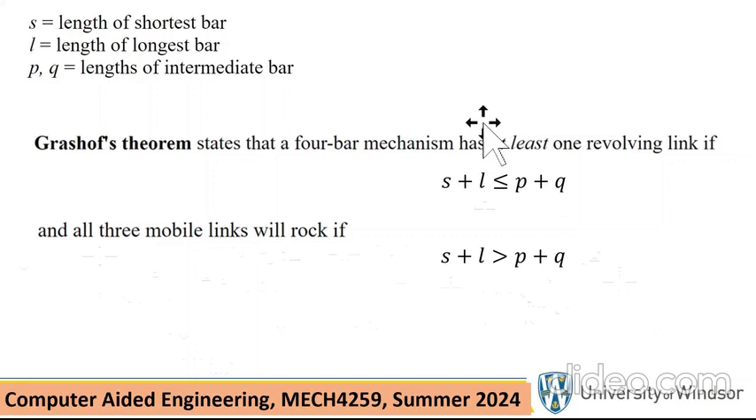Okay, so we're going to do this problem, and the dimensions that we use are exactly what is given here.

The mechanism shown here can be viewed as a 4-bar linkage. You might say, wait a minute, there are only 3 linkages here, but the 4th one can be viewed as the ground from O to C. Therefore, it is possible to actually make 4 linkages, as I did in the lecture on July 4th.

However, I'm not going to do that. I will actually make only 3 of them. And there's a few things you have to do. First of all, you have to make this thing, make a cartoon out of that, basically make it move.

And incidentally, this is a Grashof mechanism. The sum of the smallest link plus the largest link is less than or equal to the sum of the other 2. Therefore, there is one link that actually can rotate continuously, and that will be link OA.

Now, once you make a cartoon out of this, basically, you're going to apply some physics into it. In other words, we're assuming that this thing turns at 60 RPM, or 360 degrees per second.

And then we are asked to plot a few things. We are asked to plot the trace of point D, which is halfway between A and B, and also the plot of the magnitude of linear acceleration at point D as a function of time.

Insert new part in there. And I'm going to call this thing OA, properties OA, which is 10 inches.

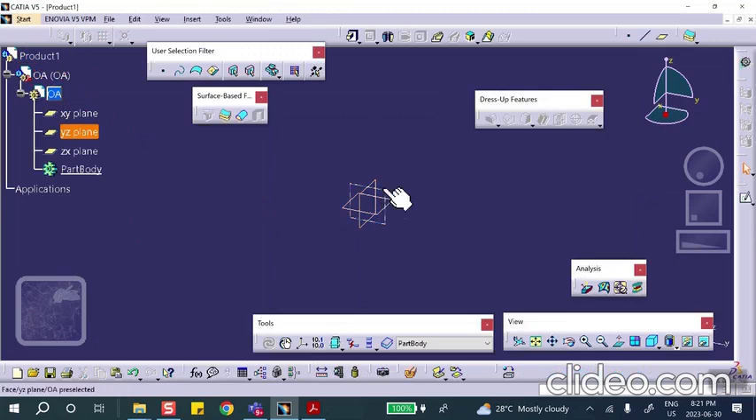Okay, let's make that. So on a convenient plane, on that vertical plane, I will sketch a profile like this.

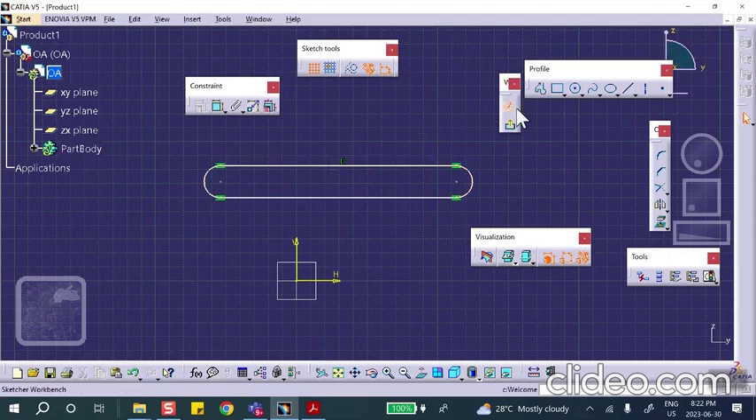Let's make this thing 10 inches from here to here. And just so it looks better, I'm going to make a little circle here and another one there. These are unnecessary, but I'll do it. This circle is going to be 0.25 inches as radius, and this one also 0.25.

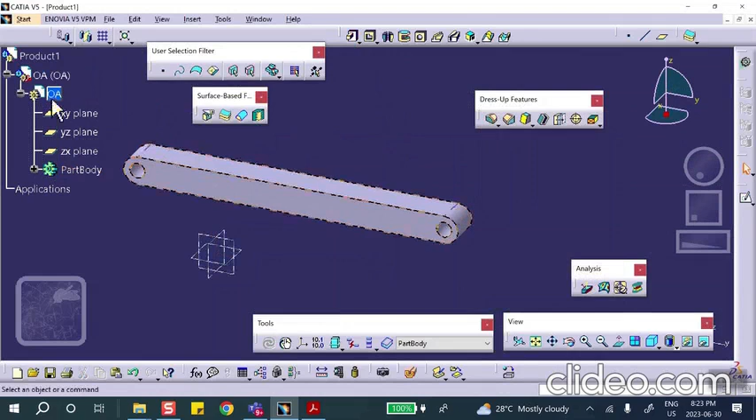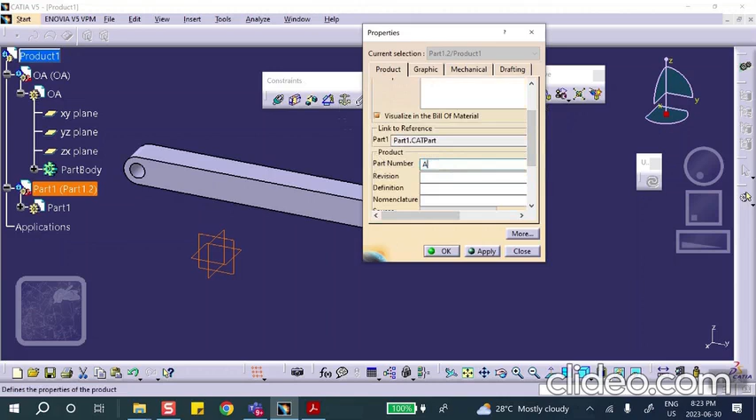Exit. Why don't we pad it by 1 inch? So then we're going to do the other link, which is AB, 26 inches. Insert new part, say no. That's going to be AB.

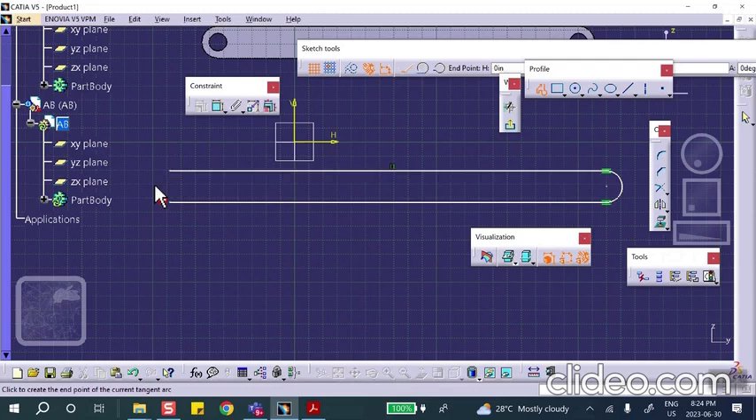Let's make it on that vertical plane. I will sketch something very similar to the other one, except that the length is 26 inches. So this will be 26 inches.

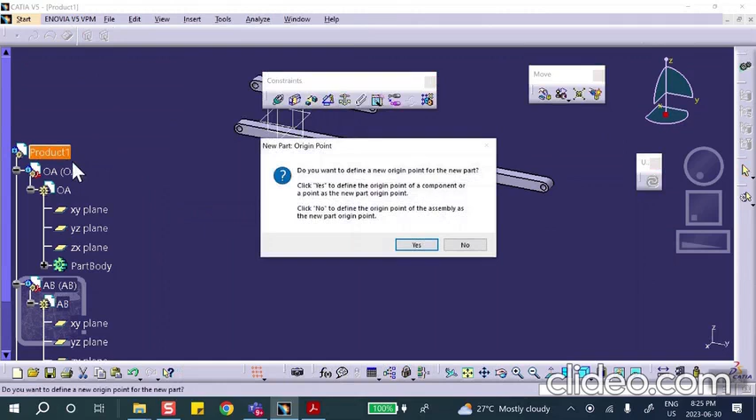Let's make some small radii here, or circles here, 0.25, one on the other side. Exit, and pad it by once again 1 inch. We go up here, insert a new part, say no, and this thing is going to be BC.

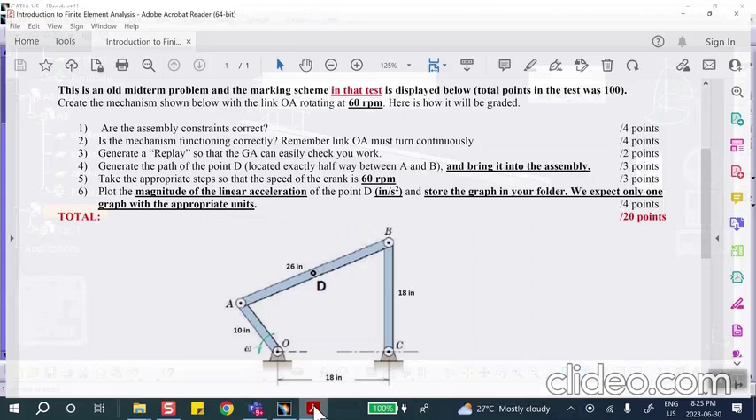Before I do that, since we are interested in plotting the trace and getting some information about point D, we might as well create a point exactly where it's supposed to be. So let's go back to AB. On that face, we sketch. What about doing a point which is exactly 13 inches away from this end?

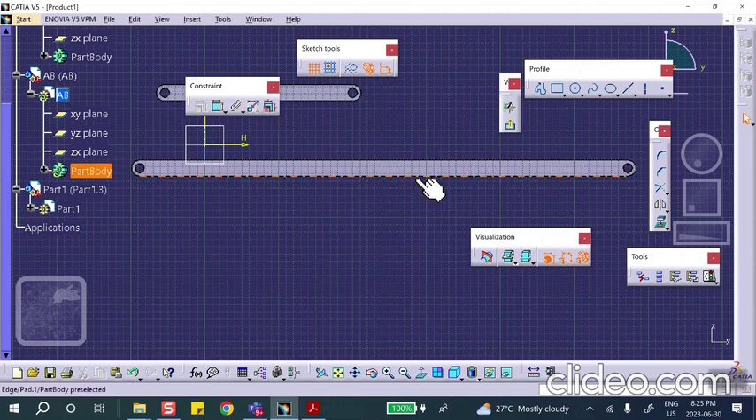Let's create a point here. Actually, maybe it's easier to do it like this. Let's create a point which is exactly the center, the center of a circle over here.

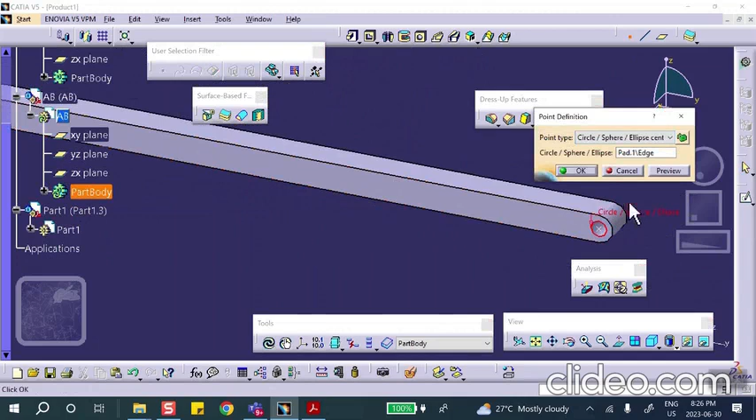I can do one on this side too, and then I create a point halfway between these two. Another point exactly between this point and this point, the middle point. There are other ways of doing it, of course. So it's going to be right there, so there's my point that I need later on.

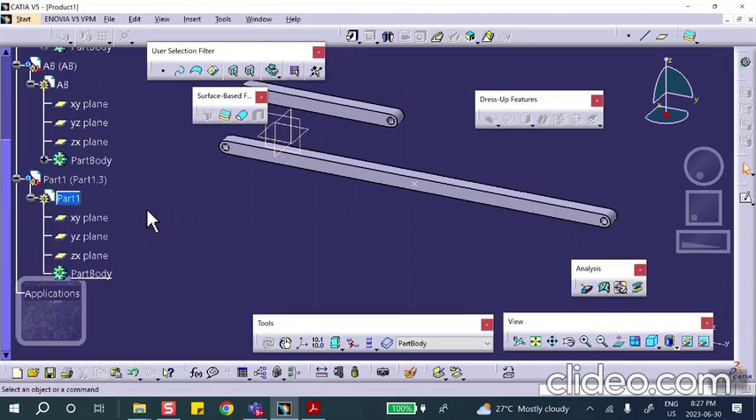Okay, good. So let's go back to this part. Let's change the name of it. Actually, let me do it from here, properties. That's going to be BC.

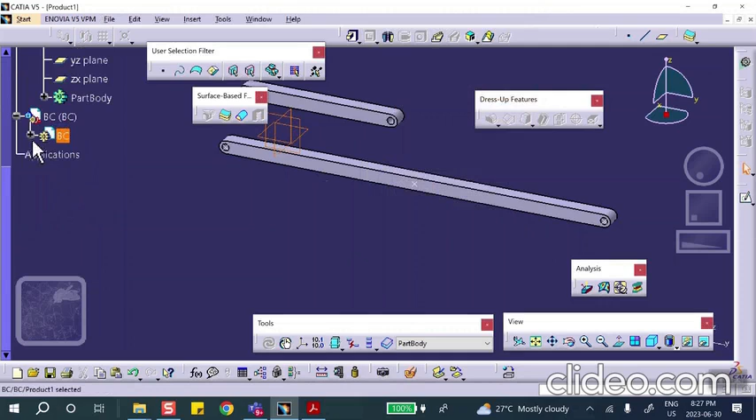Okay, let's make it. Double click, and that one is 18 inches. We are in the part design on that vertical plane. I will sketch my profile just like that, except that the length of it is 18 inches.

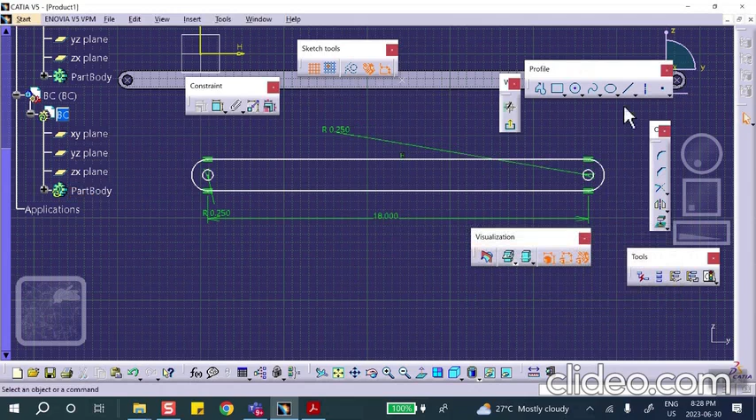Why don't I make these circles, another one on this side, give it dimensions, 0.25, and on this side is also 0.25. Very good, exit. Oh, this length is 18, right? So that length is 18. All right, exit. Pad it by 1 inch.

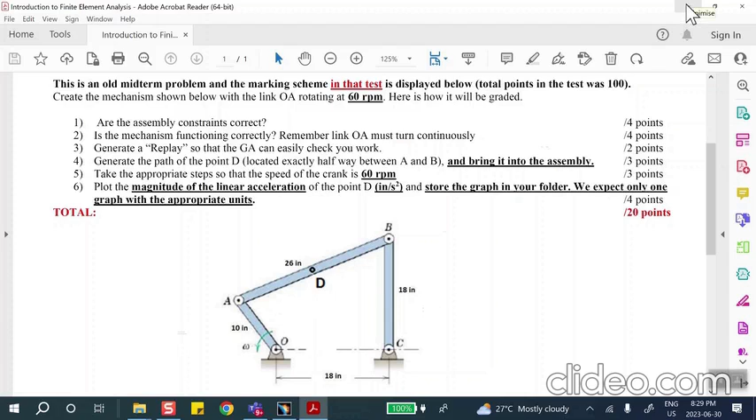Now as far as this is concerned, either I can make a link OC of length 18 inches, or I can create something I can call base, a circle here and a circle there, then pad it, and the distance between them is 18 inches. So let me go that route, because I did it with the fourth link being created a different way in the class on July 4th. So let's do it a different way.

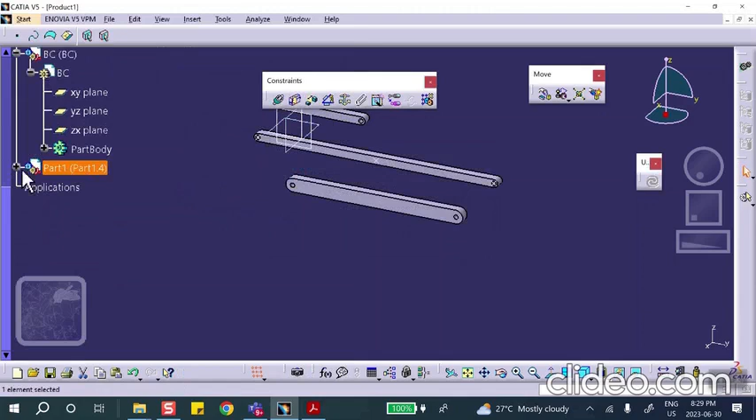So insert a new part in there, and I call it the pivots. Right click, properties. Pivots, how about that? Pivots, or the ground if you want. You can call it ground, pivots.

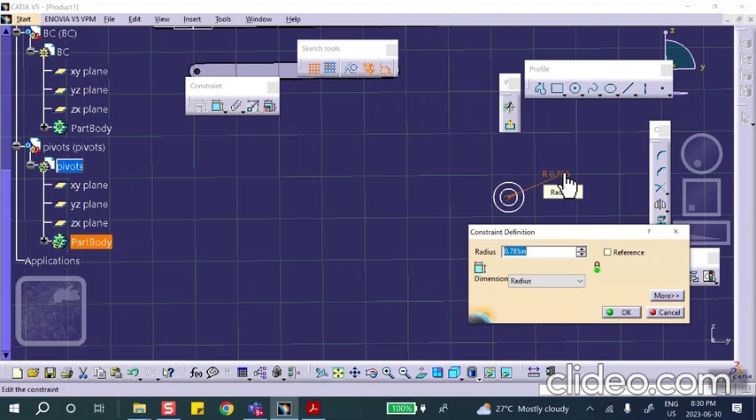Okay, let's make it. Double click on a convenient plane, on that vertical plane. I'll sketch 2 circles, one like that, another one like this. Let me give the inside radius 0.5, 0.25. Okay, all right, and do another one.

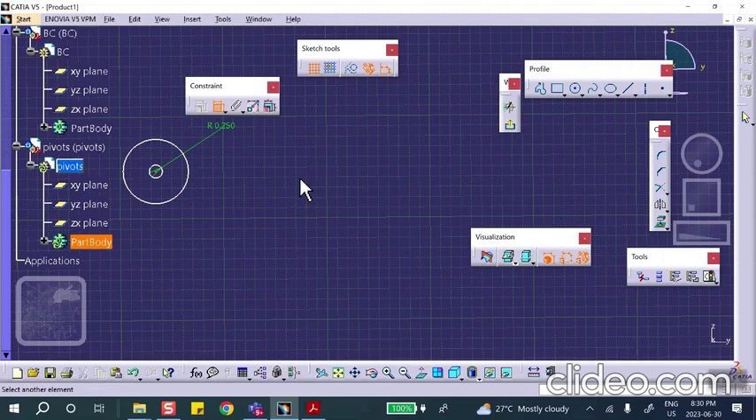0.25, and the distance between these two, this point and that point, being 18. So this is going to be my ground.

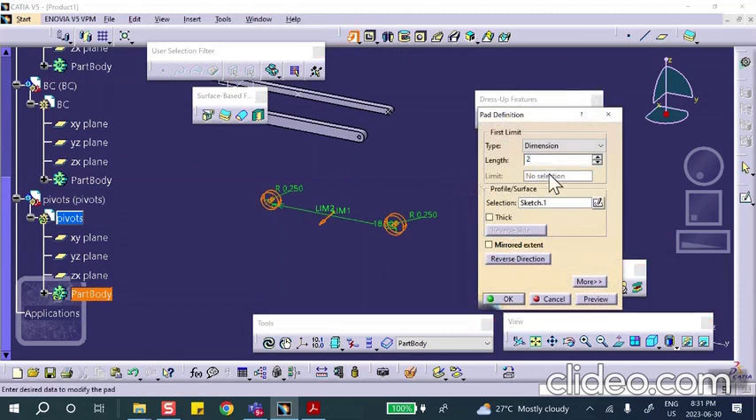Okay, good. Exit right there. Why don't we pad this thing by maybe just so that it looks better. But well, let's make it 1. That's fine. So this is going to be the ground. It's a single part, by the way. You go all the way to the top.

Why don't we save our stuff? File, save management. There's the product. Save as, desktop, new folder. So this is going to be July. What is that? 7. July 7. So everything is going to go there.

Good. Now we're in a position to assemble. So why don't we first of all anchor this part. Okay, so anchor this part. So this is going to be the ground. It's not going to move. Now I'm going to put this OA on this side.

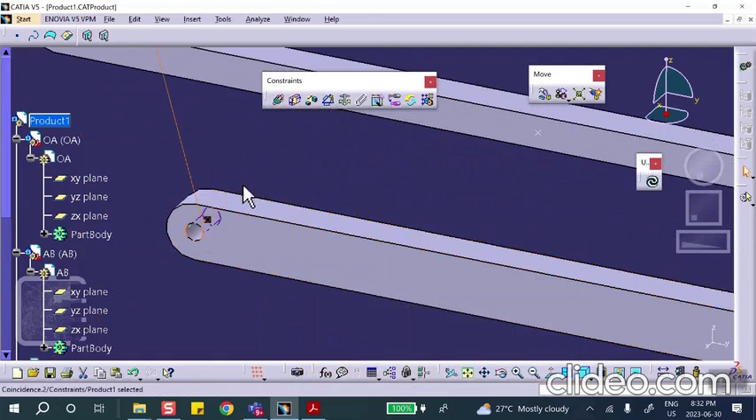So coincidence between this axis and that axis, and coincidence between this plane and that plane. Update.

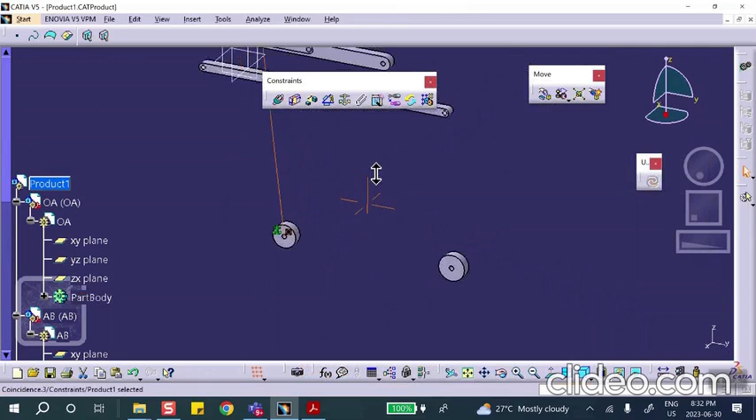Where did you go? Oh, I think I just made a mistake here. So let's do a Control Z here. Let's see now. I think by mistake this constraint should have gone coincident with this. So let me see now. This guy I'm going to delete. I'm going to delete that. What is this? Oh, this is also wrong. Okay, let's try it one more time.

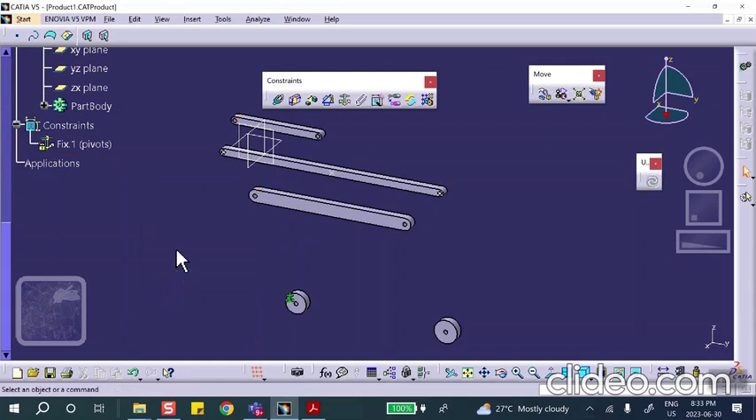Coincidence between this axis and that axis, and coincidence between this plane and that plane. And update. Yeah, that's a lot better. Now, if you see something that you don't like, see that? I don't want it to look like that. Double click on it, flip the arrows, and say OK, and update. See, this looks more civilized.

Okay. Right, let me rotate this a little bit. Rotate about that axis, like this, so that I can see it better.

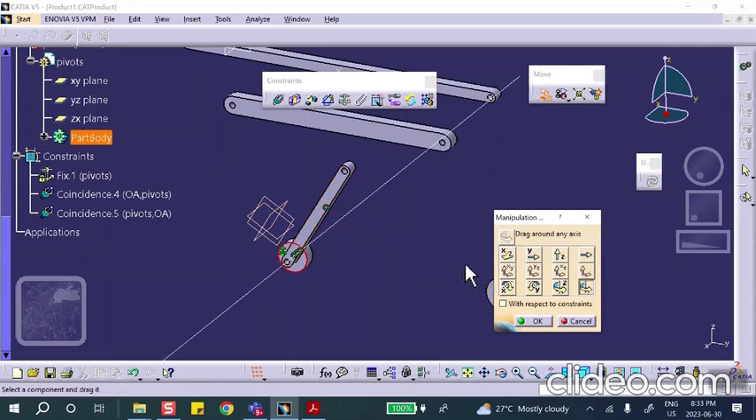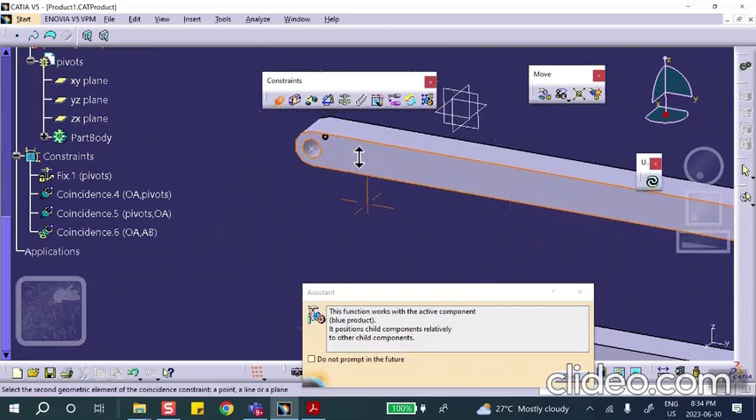All right. Now let's put this 26 inch link there. So coincidence between this axis and that axis, and coincidence between this plane and that plane. Say OK and update. Doesn't look good.

I don't like it. So double click on it, flip the arrows, or flipping the arrows is the same as actually changing this thing from same up to opposites. Does the same thing. Okay, update. Yeah, that's more respectable.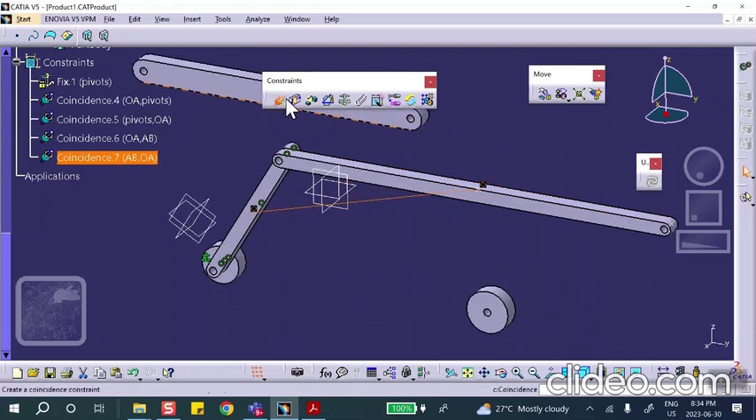Right, so now let's put this guy in there. So coincidence between this axis and that axis, and coincidence, oh no, Control Z, coincidence between this plane and that plane. Now update. Okay. Again, I don't like the way this thing looks, so click on it, update. That's more respectable. Ooh, yeah.

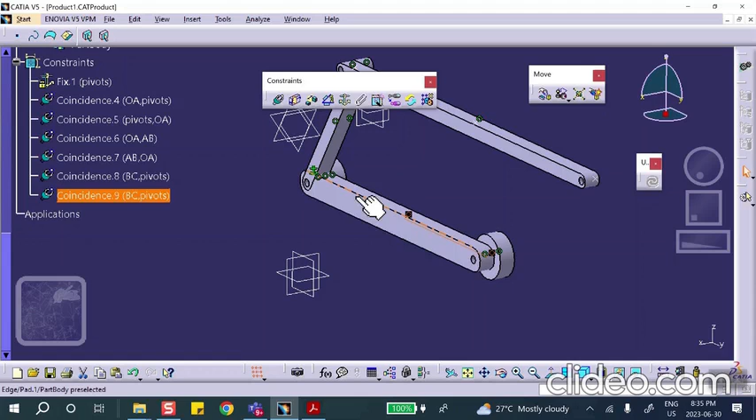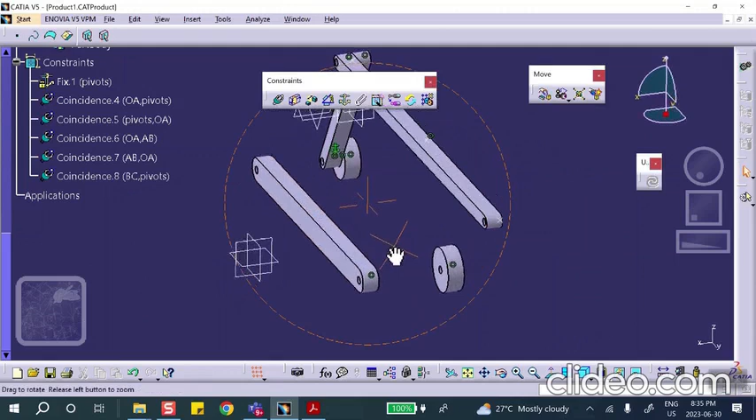Okay, as a mechanism, this thing works, but I don't like the way this is set up. So I'll tell you what I'm going to do. I'm going to delete this, and I will move that guy in the direction X. Okay, and let's see.

Yeah. And I make coincidence between this face and that face. Okay, update.

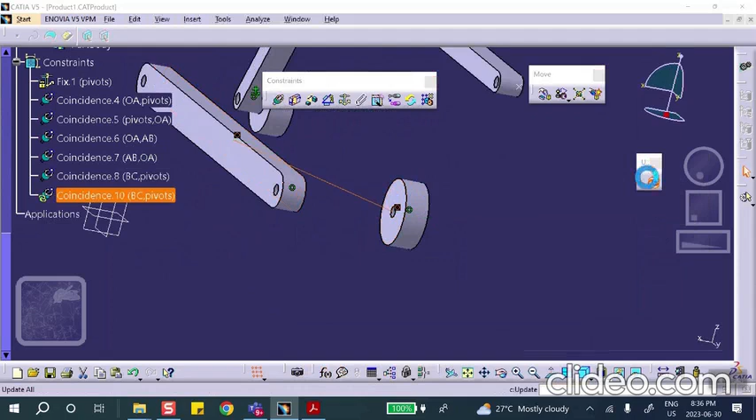All right. Now, again, I don't like the way this thing looks. So what I'm going to do is I'm going to double click on this more. As a mechanism, it really doesn't matter. This will work, but it's just that the way it is done, I don't like it. So I want this guy to be mounted on that fellow. Okay. Let me see for a second. What's the best way of achieving that? So these are okay.

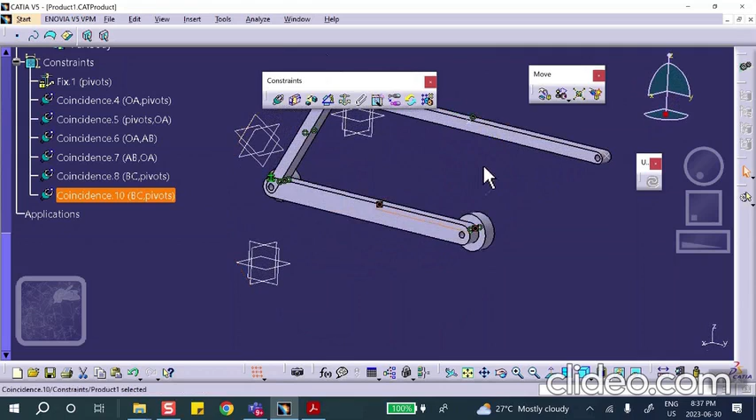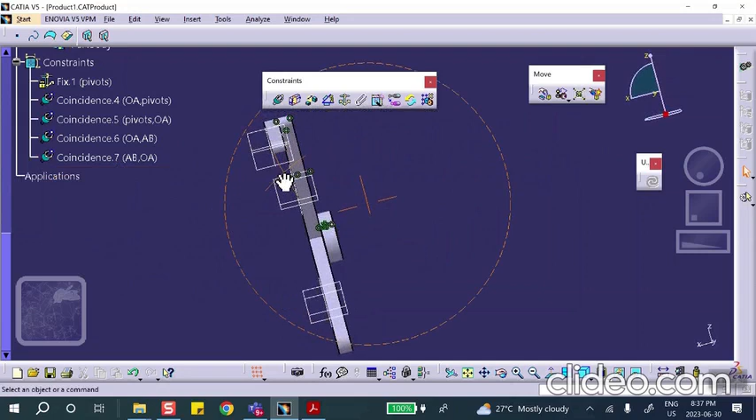Okay, let's do this. Let me move this thing away. As a matter of fact, these I'm gonna delete. I'm gonna delete this. I'll do this one first. What I will do is, let me see for a second. Yeah.

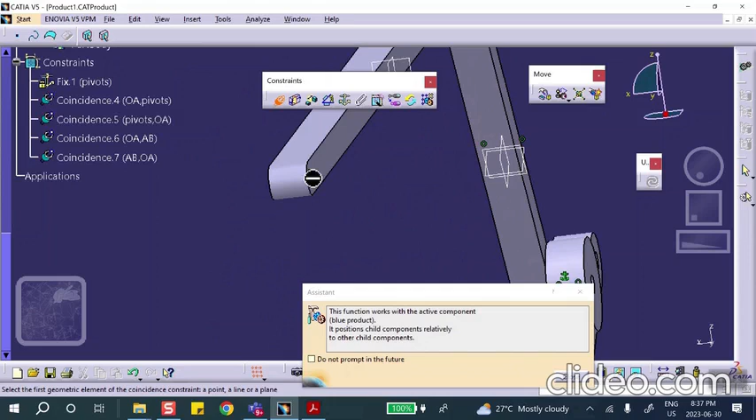Okay, here's what I'm gonna do. Coincidence between this plane, this axis, and that axis. No problem.

And I want a coincidence between this plane and that plane. How about that? Say update, except that I want to flip.

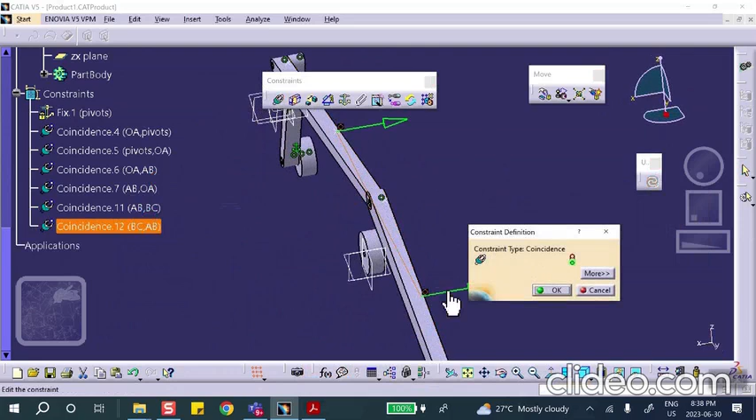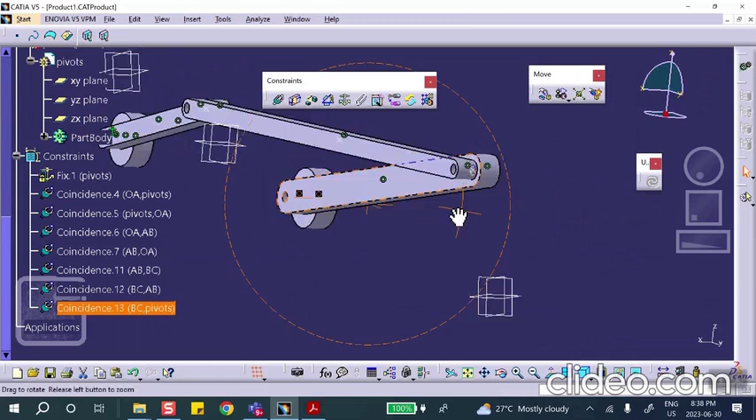Yep, that's more respectable. Now we go coincidence between this axis and that axis. Update. You see, it looks a lot more respectable.

I could have left it the way it was. It's just that it just didn't look good because when things were going through each other, etc. But as far as the mechanism is concerned, that would not have made any difference.

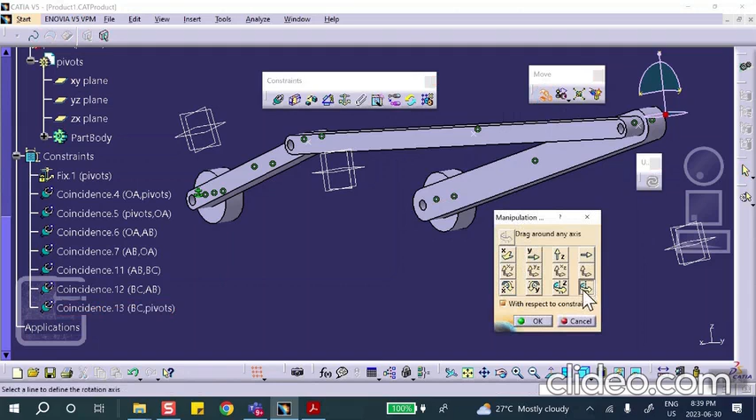So I'm going to go to the move, manipulate icon, check this box, and say rotate about, for example, this axis. But yeah, but this axis. Let's see if it works. Yeah, you see that? You see?

Yeah, good. So we know that this is working. Okay, let's go ahead. Very good. Save everything. Once again, I want to emphasize that I spent some extra time here trying to make it look good so that these parts don't go through each other. However, as a mechanism, it will not make any difference. But I want to make it look exactly like what I'm presenting to you.

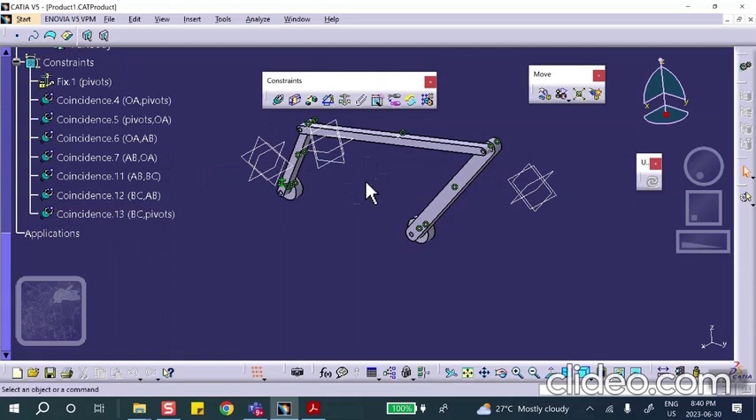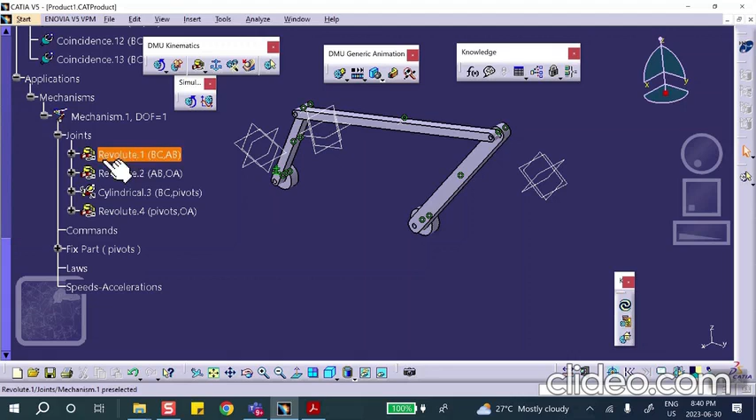So now we're going to go to digital mockup, DMU kinematics, get the magic wand out, new mechanism, auto create, and I'm going to have one revolute, two revolute, three revolute, and a cylindrical, probably, unless I missed something. Yeah. Okay, good. Degree of freedom is 1 because this is the crank that can turn continuously, and that first one, I believe, was revolute 1.

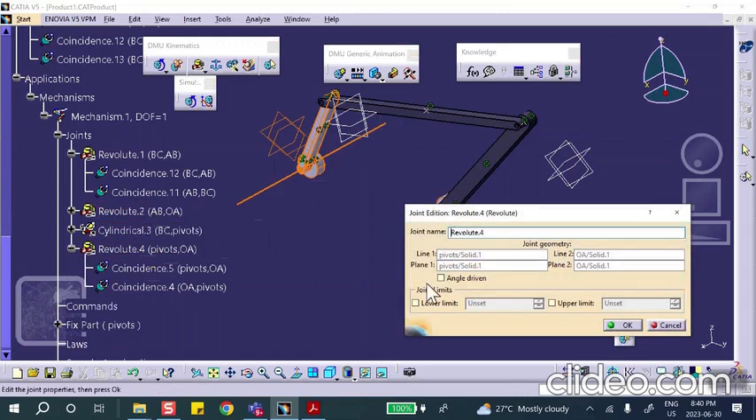No, no. Which one was it? Between AB and OA, right? No, cylindrical, is it this one? Oh yeah, that's it. OA. Okay, so make it angle driven, make it 0 to 360. Good, mechanism can be simulated. You can do a simulation with command. Let's check it out. You can see, that's the one that turns continuously, and then reset it. It's fine. It works. Okay, good.

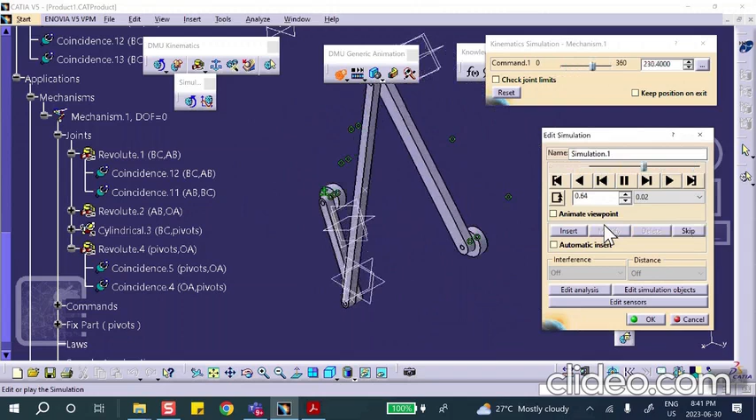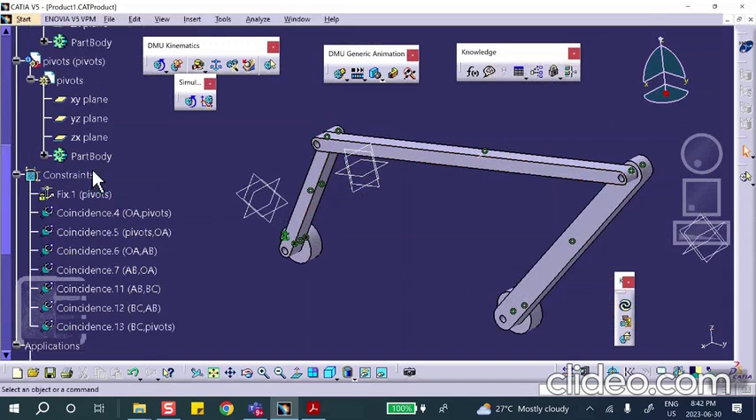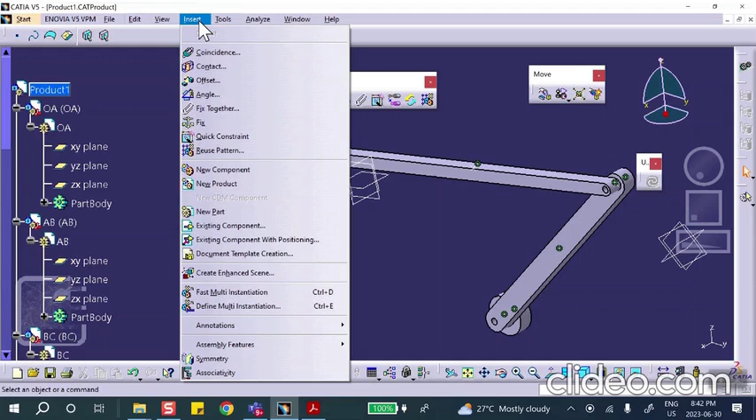Incidentally, if you want to hide all these planes, it is possible. The easiest way of doing it is if you go back to assembly design, okay, and say view, hide. Is there a hide here? Let me see. That's edit. Oh, sorry. Tools. I thought there was a view hide all planes or something like that, but I don't see it. So let me do it a different way for you.

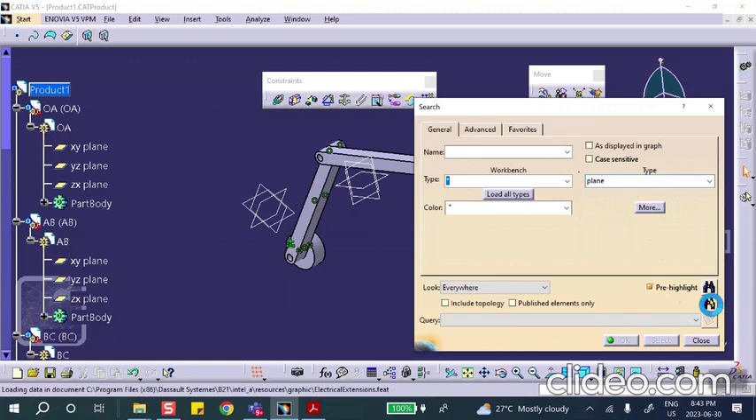So what you can do is here. This is how I'm going to hide and show. Okay, this is the easier way of doing it because I can't find the thing I'm looking for. Search. Type here plane. Not there. In here, the type plane, and search and select. And once it finds it, just hide them. There. Okay, good. And go back to digital mockup, DMU kinematics, back there.

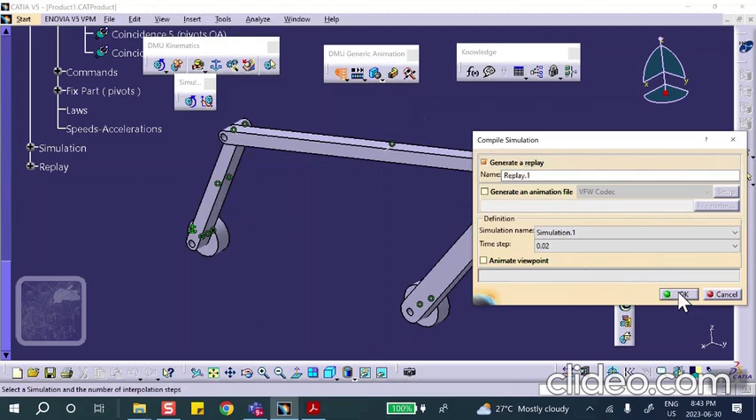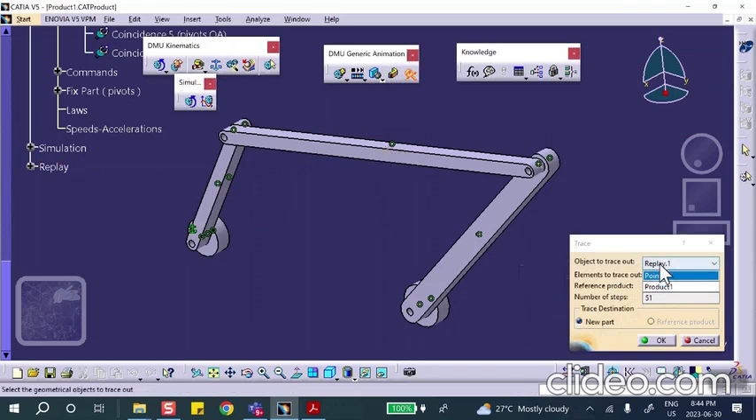Actually, it looks like I can't change that right here. That's okay. Oh, something I must have forgotten to do. Let's close this. Don't save it. Try it again. So where is that trace? Element to trace is this point. Yeah. We created the replay. Good. Oh, he was there. He was hiding there. So save this thing, file, save management. The trace was here. Save as, in that folder, save the trace.

Let's see now. This is the trace. Yeah. Save as. Trace 2 is fine. That's okay. Let's get rid of this. Can I insert the trace? Insert existing component in there. Trace right there. Good. So if I do the replay, you see that that point actually goes through this. Okay.

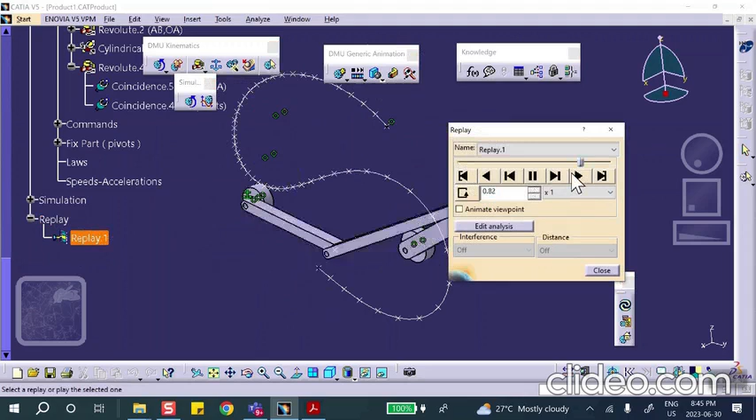So, try it again. You can see that point in the middle of the link AB traverses that curve. Okay, so let's stop that. And if you don't want the trace, just hide it, but make sure you save it, because when it comes to exam, we need to see it if you're asked to generate it. So where's that trace? Right here, hide it.

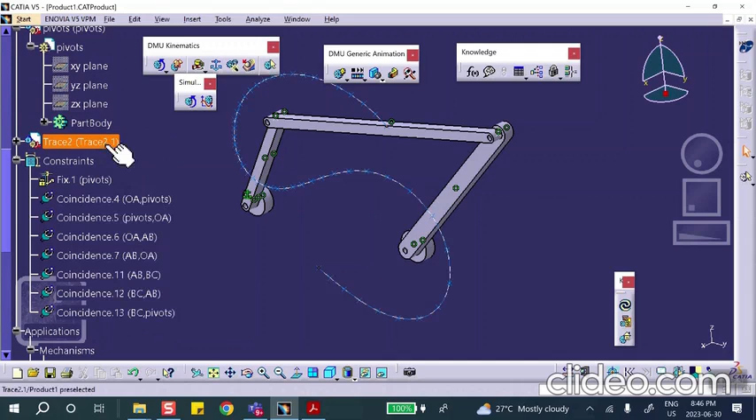Now let's put some physics into this. So we go to f of x, click on the mechanism. So this is the angle-driven joint. So we say add a formula, 60 RPM was 360 degrees per second. So 360 deg/1s times time.

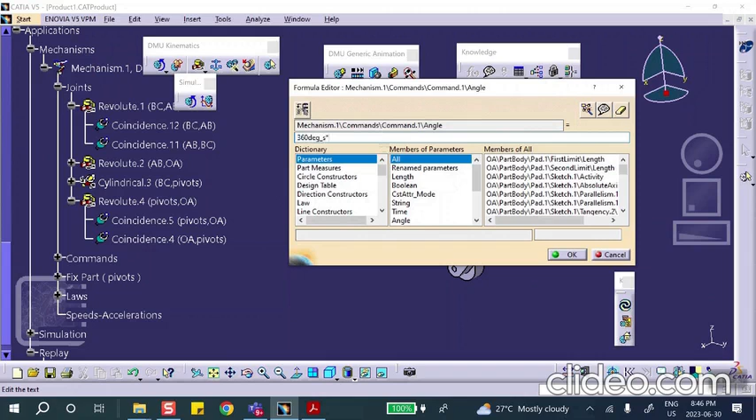All right. And let's go and do a simulation with laws. Simulation with laws. Let's do it 2 seconds, a 2-second period, and play it. There is physics here. Believe me, there is physics. Okay. There is physics. That's why it's not that choppy either.

Now, let me actually make it 3 seconds. How about that? I mean, the problem statement says 2, but I'm going to make it 3 here to convince you that actually that choppiness is not there. See that? 3 seconds, it does 3. So here, let's put it back to 2. On the test, if you're asked to do it for 2, do it for 2, please. Rewind, play. Good. Okay.

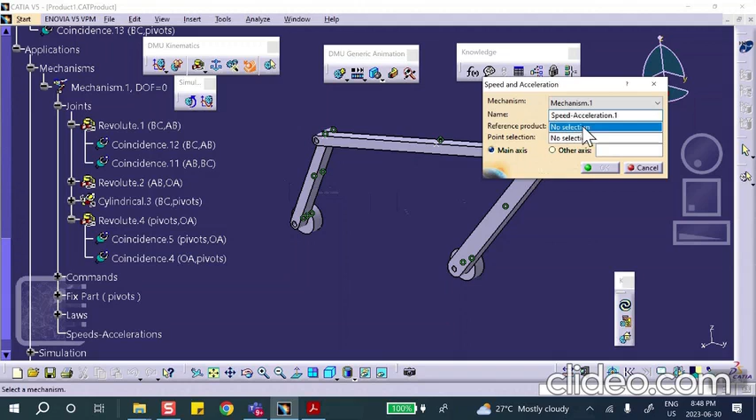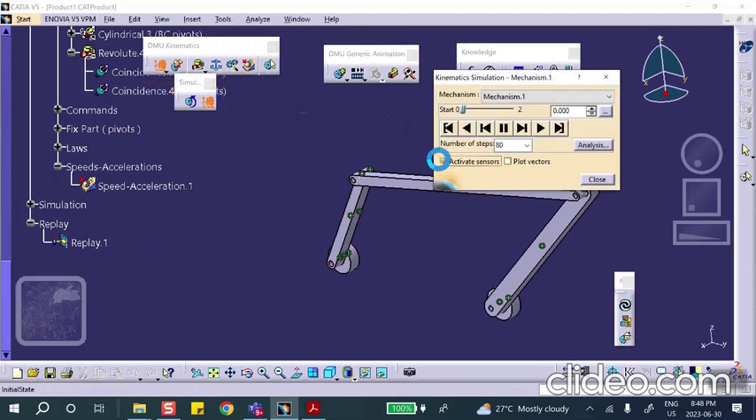You're asked to plot a magnitude of linear acceleration, but there is no magnitude thingy here. But linear acceleration, actually not speed, acceleration, right? Linear acceleration without any x, y, z in front of linear acceleration. This is the magnitude. We're asked to find the magnitude of linear acceleration. Yeah, good. So now we requested that information right there.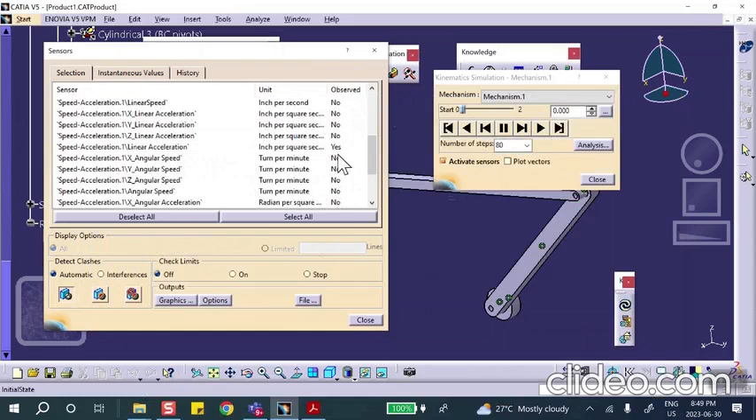You can see that. You play it. And then you say graphics. And there we are. So this is the linear acceleration of that point as a function of time. That's what you're asked to generate. Now make sure you zoom out so that everything is there. The scale is here, the units are here, and then you do a print screen here.

So you go to the Word document, paste this thing, home paste. There we are. This is what we want to see when it comes to marking your test or your homework. File, save as, browse, desktop, that folder which I call July 7, and you put down my generated plot.

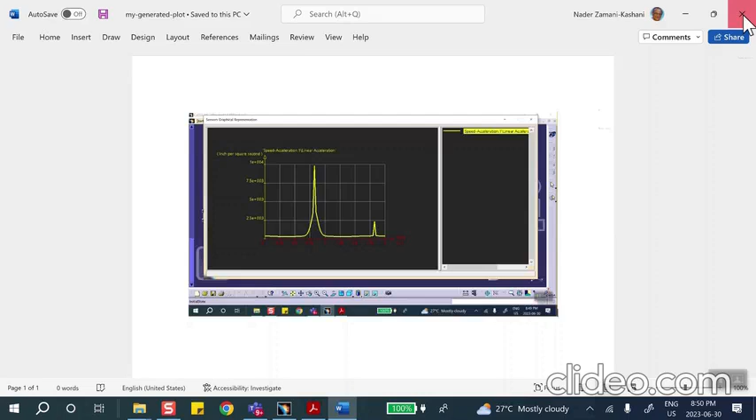Make sure you give us only the plot that we're asking for. If we're asking you to generate a plot of, for example, linear acceleration versus time, don't give us the x component of it or the y component of it. Don't give us the velocity. This specific plot is what I'm looking for. Okay? Otherwise, we will deduct marks. The rationale is that you don't know what it is that you have to do, so you decide to plot everything. So that is a no-no. Okay, so this is all done.

This is a short video segment that is related. Both of them involved a 4-bar linkage, and this particular screen that you see here is for the morning class, but the same issue came up with a couple of people in the afternoon class. So here's the situation. This is a 4-bar linkage because the fourth bar that's not showing is actually the ground. In other words, I could have made another link here instead of these two pivots, and held that stationary. Okay, so this is a 4-bar linkage.

The question that came up, from a couple of people, is why is it that the fellow next to me is getting a trace like this, and I am getting a trace like that, or the other way around? In fact, when you look at this, what we have here is half of one trace. And the question is why? At the time, I didn't know what they had done or what I personally had done on the video, but here is an explanation of what happens. Although this is related to the morning class, the same thing applies to the afternoon one, if you're not getting exactly the same thing that the fellow next to you is getting.

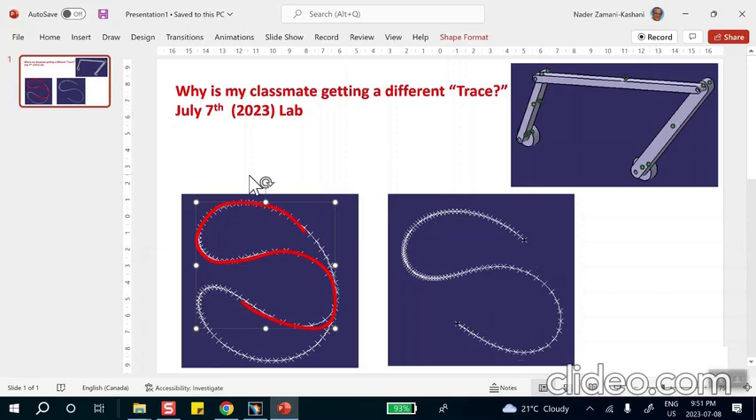So what happens here is that when I did the video, I made this crank right here, I think this was called OA link, go only one revolution, not two revolutions. When you go one revolution, you actually get this. But if you make it go two revolutions, then you get the full trace. Okay, so to do that, I'll go back here. This is actually part of the video that I had done. So let me show you what my mechanism is.

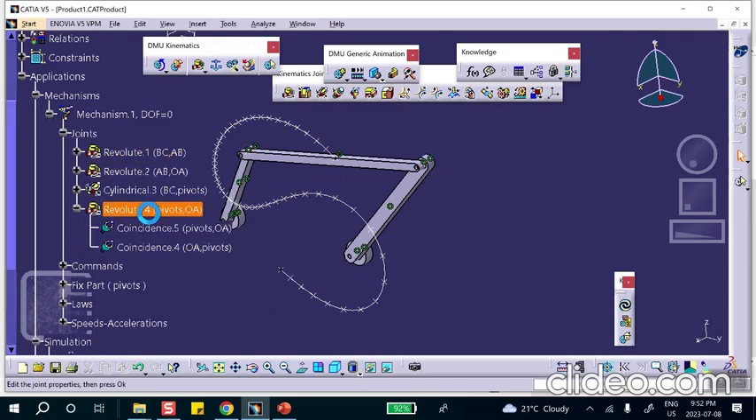Right here is the mechanism, right there. I made a similar one; this is the mechanism right there. And these are the different joints. And this particular one is the driver or the crank. And notice that I said 0 to 360. So I have to fix this and make it 0 to 720. And let's see if we can do that.

Now, before I do that, let me tell you that I can go and delete this replay and simulation. I can do that, no problem, and kind of start fresh. That's one option. Or you can keep these and create a new simulation and a new replay based on this modification that you have done.

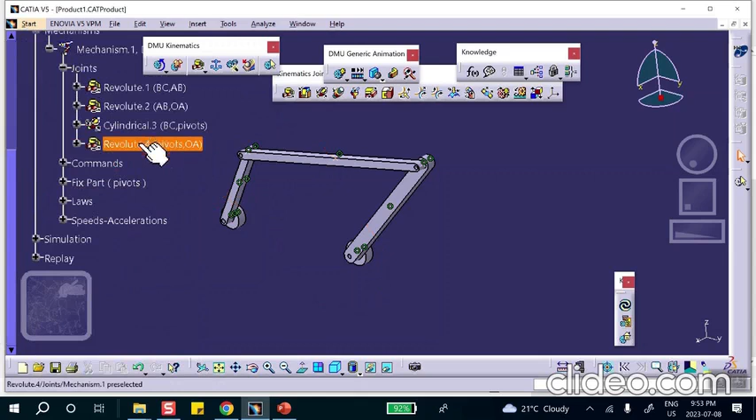First of all, this guy, I don't want to see this. Let me see if I can find it. Hide it as a part. It's right here. Right here as a part I can hide it so that it doesn't bother us. We go down here. I go to this last revolute joint and make it 0 to 720.

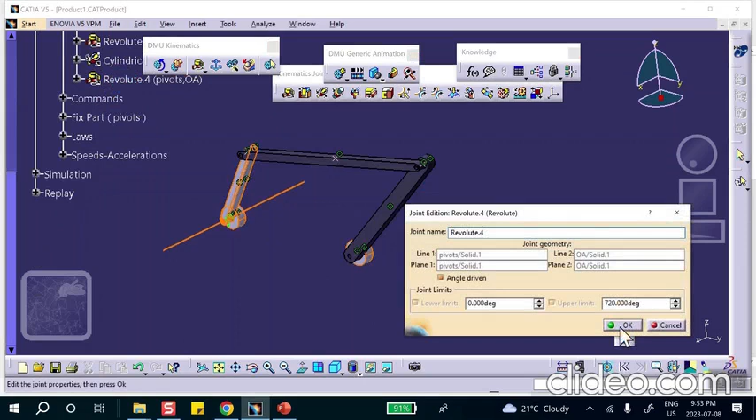Whatever changes you make here are not going to affect the simulation that you already created or the replay. That's why you have to create a new one. And you say, okay, good. So now if you double check, it says 0 to 720. Very good. So let's go create a simulation of mechanism number one that we just changed a little bit. Notice that it goes from 0 to 720.

But before I do that, let me cancel this. Let me bring this thing back to the position 0 if it's not there. See that? With this simulation with command, you can bring it back to the 0 position right there. Okay, and now I'm going to create my simulation. Mechanism number one.

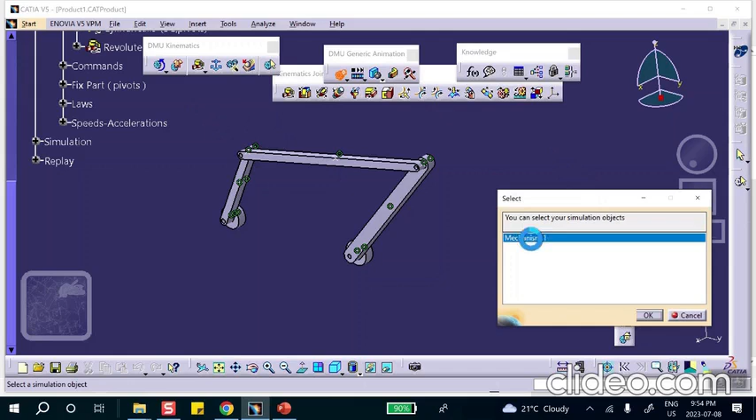Notice that it starts at 0 here. Before, I did that manually, brought it back to 0 position. It started at 720. So let me drag this thing all the way down. Notice that the crank is turning twice. Insert. And if you want to see it, no problem. Change the speed, rewind, and play it. It's going to go once, and then twice, and stop. Good. So the first step is actually to create a simulation, and you call the simulation number 2.

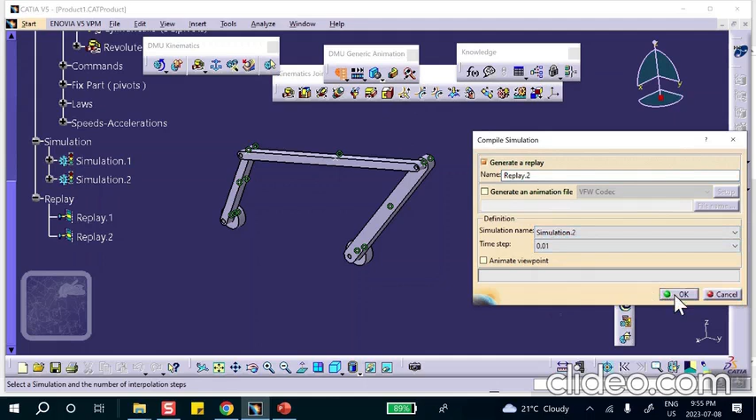Now let's compile this, because to create the trace, you have to compile it, which means you have to create another replay. Already we have one replay here. See that? Replay one, but I don't want that. That's the one that was only half of the trace. So where is that? Where was it here? Right here. Compile. Not simulation one, not this. This already has simulation two, and change the speed and play it. Notice that the second replay has been created right there. You can see that. Very good.

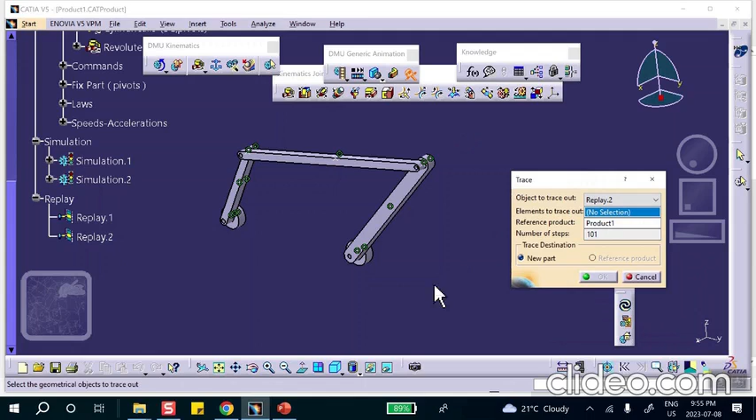Okay, and now we're going to go do the trace right there. See that trace? Trace. Okay, not replay one, replay two. Okay, and the point is right there. And we say okay. And notice that the trace has been created. It's down here. You see? Now the rest of the stuff is the same.

For example, you have to save this obviously. File, save management. There is a trace that we just created, trace number 2, and we're gonna give it the same name, obviously. Same name, trace 2. What is that? Trace 7? Did it say trace 2 or trace 7? Oh, trace 7. Okay, because I've done a few and deleted them. Okay, good. Now we can close this.

We can close that. And then insert, if you want to see it, insert existing component in that product. And it's going to be trace 7, right? Trace 7. And we say OK. And there you are. All right.

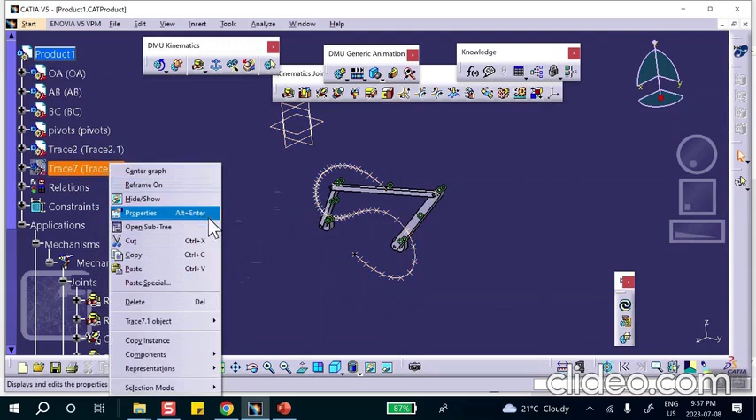Now this trace 2 is there. I just kept it there, or I hid it right there. If you hide trace 7, you can see trace 2, which I really don't need. So that's half of the actual thingy. So if I hide this, the actual trace is trace 7. The other one is half of it. Good. I hope that clarifies the situation for the few people who asked me.

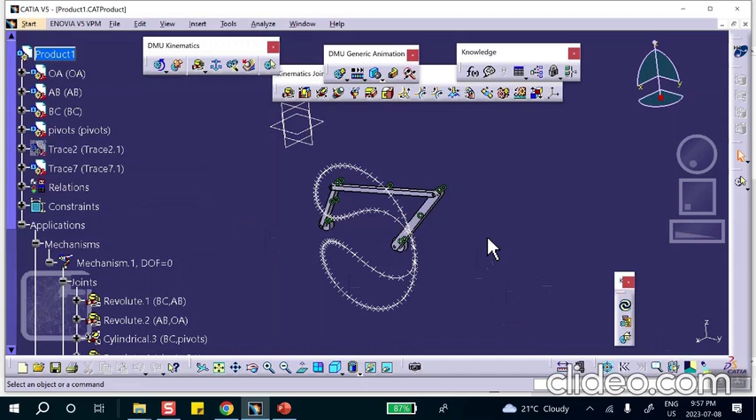Okay. Now, a similar question came up in the afternoon session, and it's probably the same story. I didn't bother looking at my video.